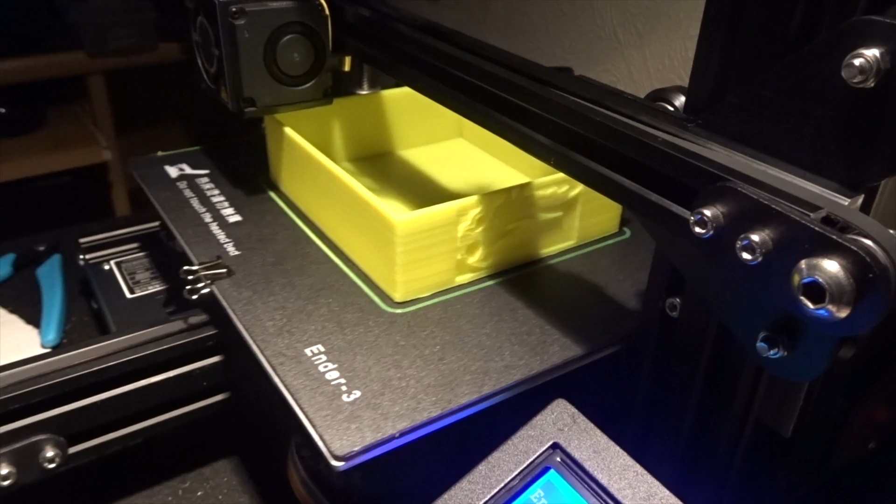Hey folks, JD here, and today we are looking at part 2 of the Alpha 1 project.

So in case you don't know what the Alpha 1 project is, this is a brief recap. The Alpha 1 project is my 3D printed quadcopter that I decided to print a couple of weeks ago. I wanted to start making my own fleet of quads, so this is a very basic design that I took from Thingiverse and I decided to adapt it. We're going to talk about the adaptations in a couple of minutes, but essentially I printed it, I built it up then with a load of quadcopter parts, took it out for a flight, and actually it worked pretty well.

Now back to those modifications. If we just switch for a second to Tinkercad, you'll see that what I've done now is I've made the quadcopter a little bit wider and a little bit longer. That now gives me the ability to raise the quadcopter ever so slightly, and with raising it I also add a little bit of extra diameter to the motor mounts, which was one of the major issues I had last time. When I went to test in part 1, the quadcopter fell out of the air, landed on the floor and smashed one of my motor mounts.

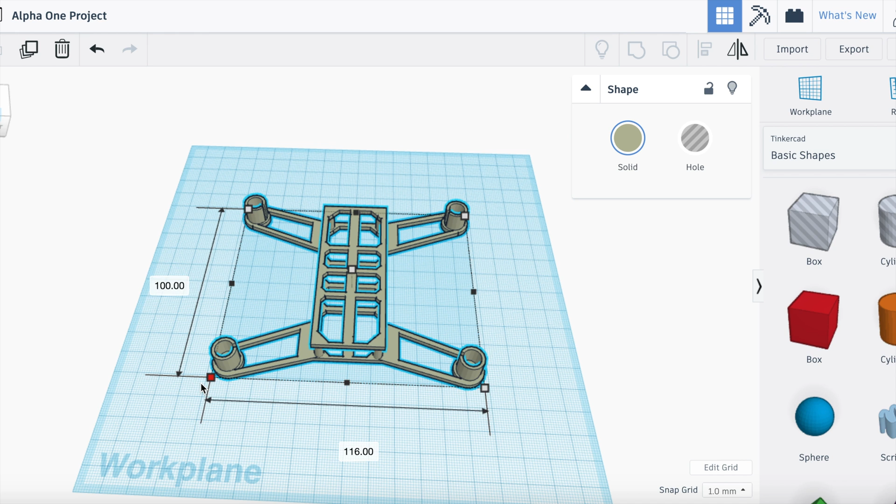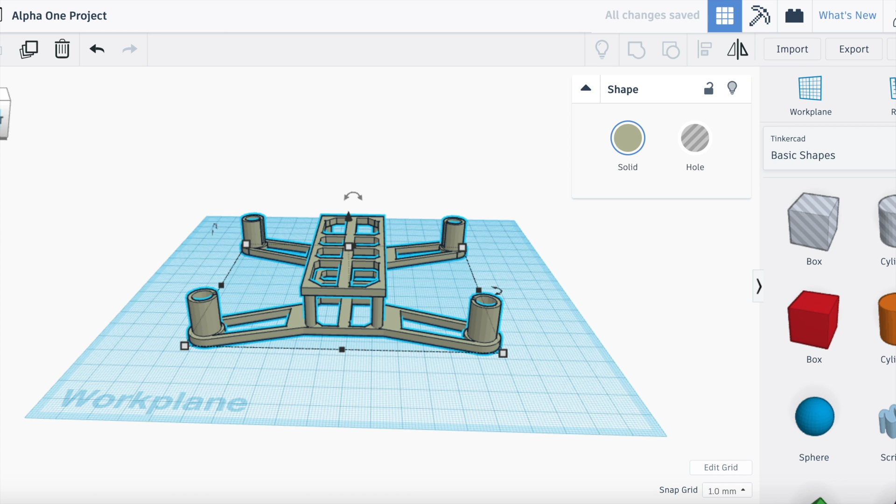The reason it fell was because the motors were pushed in so tightly that the motor mount itself actually split open, causing the quadcopter to become unstable. Now, with me elongating that quad, you're making the motor mount slightly larger, but also with me raising the quad as well, the quadcopter's motor mount actually raises a little bit higher, as you can see here, which means that I can slot a motor in, and the motor mount is going to be a little bit further up the motor. Now in time I may have to make a couple of holes in the motor mounts just to get some more aeration in there, but for now that's okay.

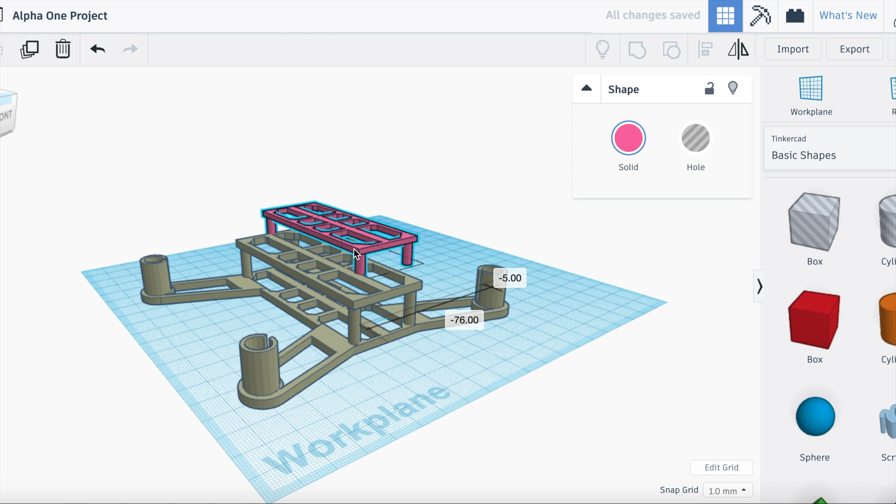Then I decided I wanted to raise the main body up as well, give it a bit more height. That then allows me to put other quadcopter components inside there. So I printed that out. I was pretty happy with how that looked, but then I thought about some other modifications. Those modifications being, now I've created this quadcopter and made it a lot larger, I need to put a larger battery in it, and also I need a bit of space for the FPV camera or AIO camera. So I decided then I was going to double up on the already made part of the quadcopter, the sort of cowling over the top of it, and I thought that I would then take another one of those and make it the exact same size, and give it sort of like a double head.

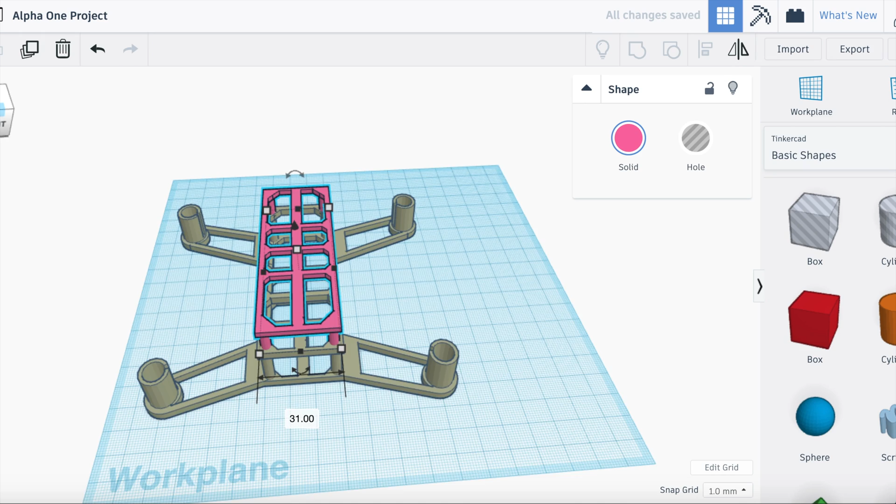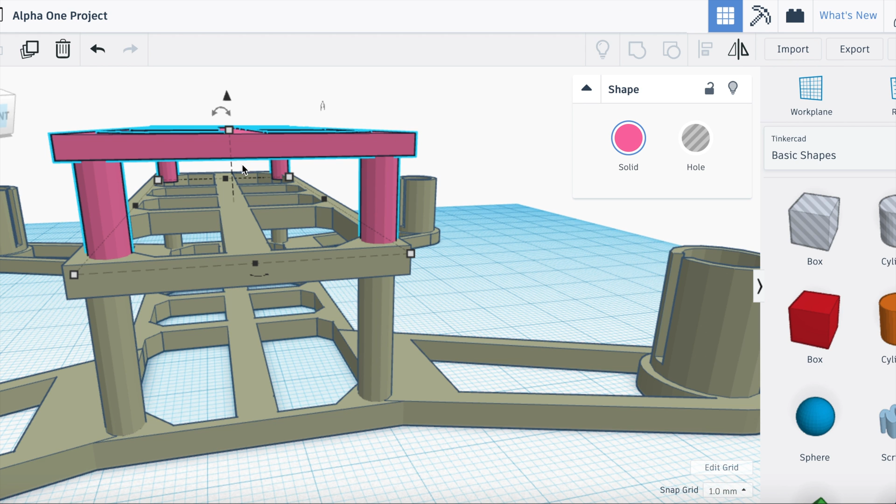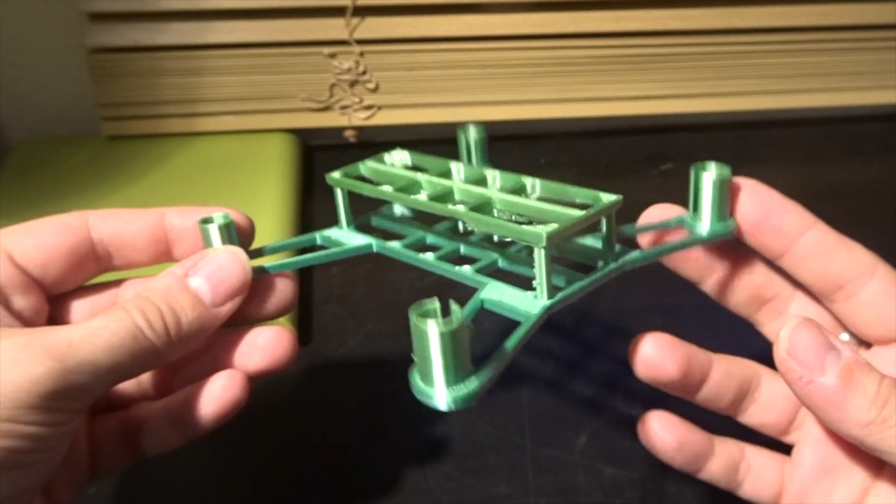So inside here I'm just making sure that I have actually got everything lined up properly. I want to do that at this stage, in the computer-aided design stage, rather than when it comes to the manufacturing. Now then, I took a little bit of time, I printed out both models for you to see, so let's go back and have a look. Okay, let's have a little look at version 2 for a second. So this is it. So let's put that against the first one that I printed, which is here. You can see there's quite a bit of a difference.

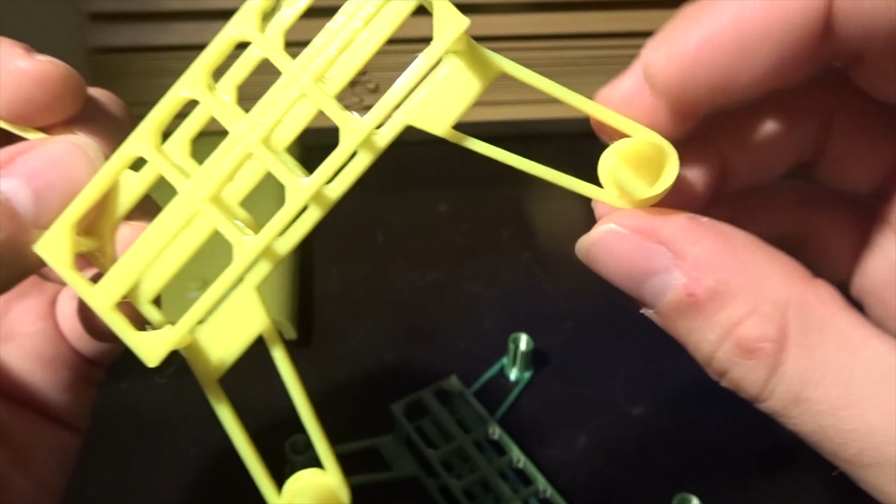So I've raised up the middle part. I have made the quadcopter a little bit bigger. Now, whereas we have our motor mounts here in the original one, which are quite cylindrical, quite circular, here what I've done is I've pinched them a little bit. So I've made them more oval. So therefore, when the motor fits in, it has almost a crimping effect. So when the motor goes in, it just kind of pinches it a little bit.

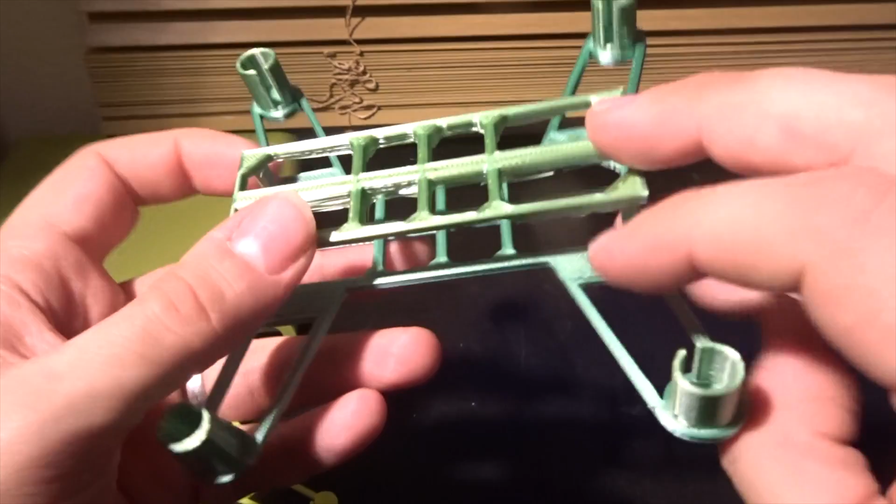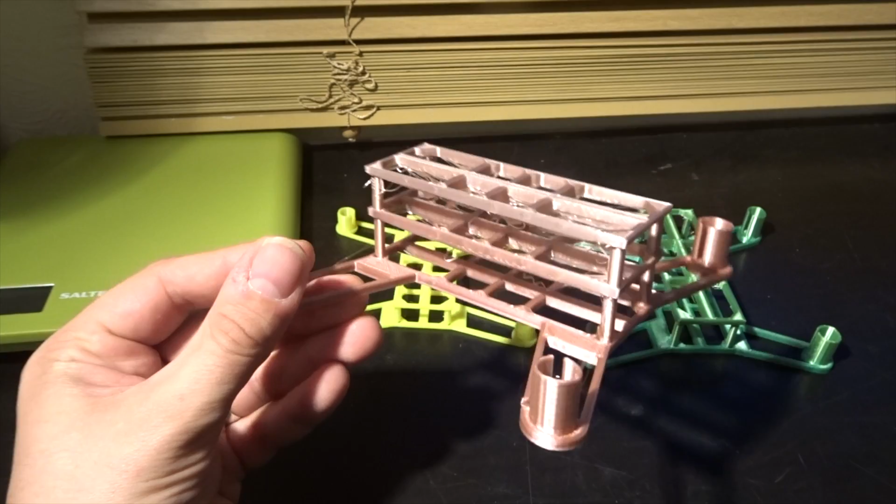So that is the new one. That's quite nice. I quite like the look of that. And hot off the press, we've got version 3. So let's have a little look. So we've got version 1, version 2, and then version 3, which I haven't even tidied up in any way. It has just finished printing, and this is it.

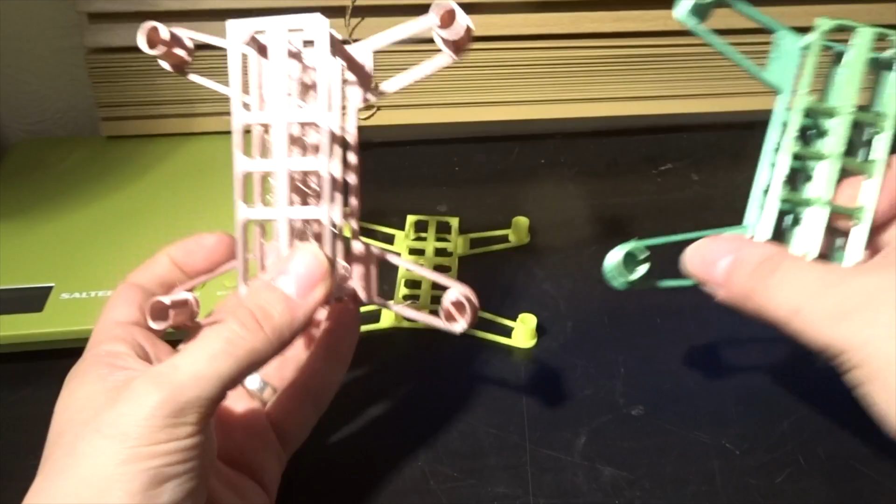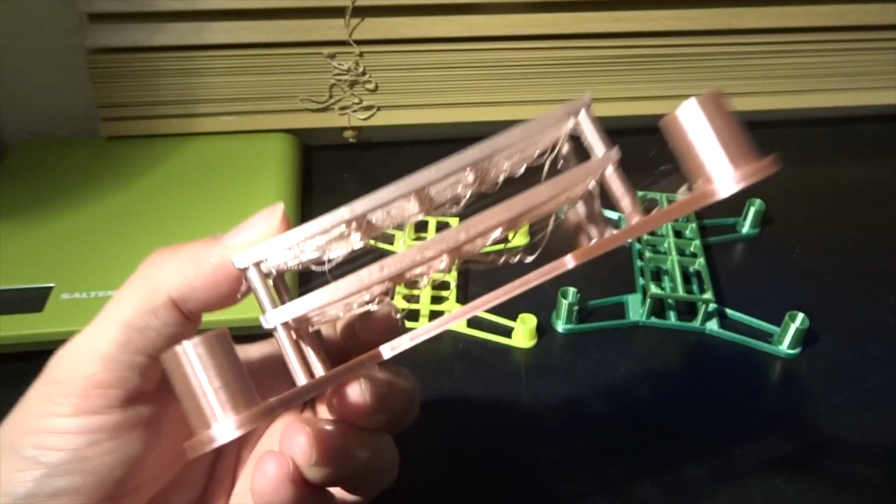So we've got the first layer here for the printed circuit board. We've got those oval cups again, same size as version 2. So I've got these oval cups for the motors. They just fit in there, get pinched a little bit, and then the top bit here, when all cleaned up and all the little bits of PLA are removed, then we've got the printed circuit board here.

We've got a little battery in the back here, and then we've got a little camera at the front, whose antenna can fit up through there quite easily. So this is version 3. I'm quite excited. What I'm going to do now is put printed circuit boards and motors in both of these, and then I'm going to take them up for a flight and see exactly which one does better.

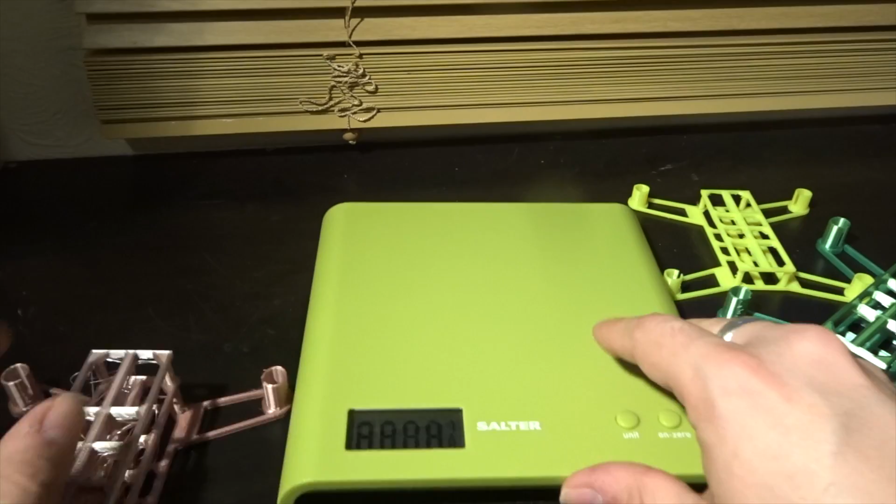I think, to be honest, they're going to fly okay. I'm going to have to put a little bit more powerful motors in here, even though there's not much of a difference on the overall design. So the first design here, version 1, bare bone, is... Oh, sorry. Let's try that again. Version 1 bare bone is 7 grams.

Version 2 is 13 grams. So even though it's the same design, obviously because it's a little bit bigger, you're going to have a bit more weight with that. And then version 3 is going to be a little bit more. So that's 17 grams. So all in all, it's not that much more weight. So I think, to be honest, the original motor and the original printed circuit board that I had in version 1 would quite easily lift version 3.

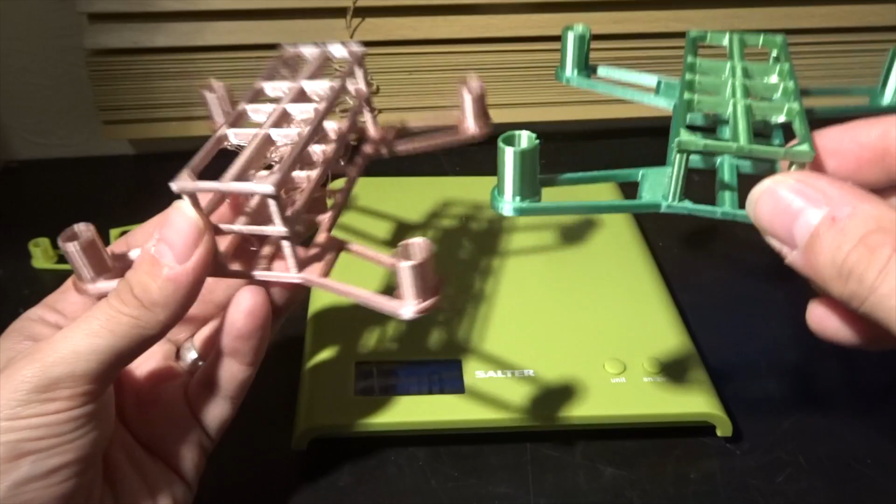But what I'm going to do is tidy up version 3, take version 2 out for a spin, and then do version 3. I'm going to do videos on all of it so we can see the comparisons between them. And then from there I'm going to tweak this body a little bit more and start to refine it. So start to curve it and make it look more like a quadcopter rather than a floating bus.

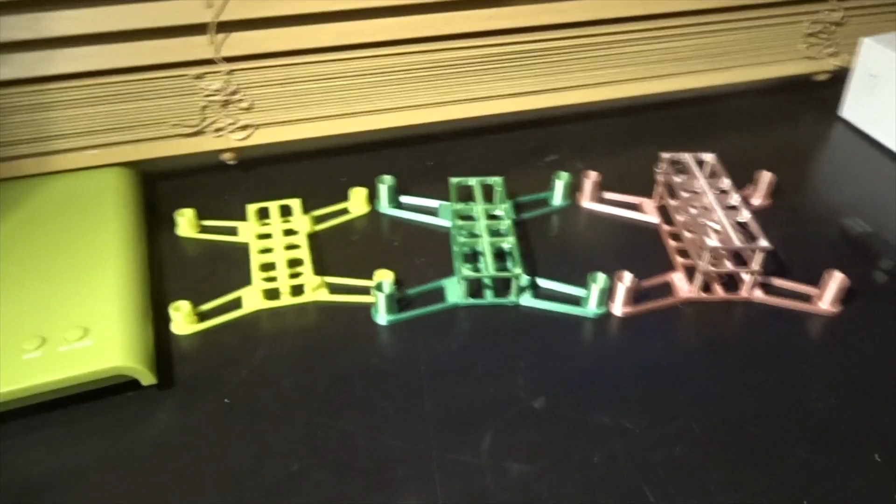So there we are. That's version 2, version 3, and of course, let's not forget the original and what everything came from, which is version 1. So let's line them up in chronological order there. So version 1, version 2, and version 3. So not much difference other than size, to be perfectly honest with you.

The difference between these two is the overall size difference on 2 versus 1, and then version 3, the difference here is this extra body, this extra plate on top, just for the battery and for the camera. The overall size is the same as version 2, so I think they're going to work quite well. Alright then, my friends, next thing to do is to gear these both up and take them both up for a flight and see exactly how they do.